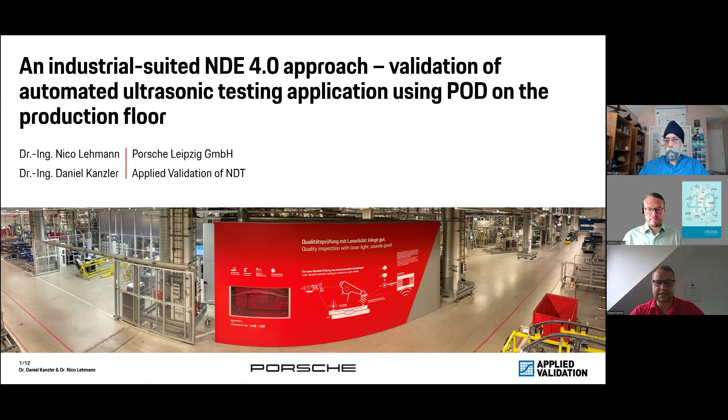And how do we get there? Well, I want to give you an idea, show you how the process is working, etc. Right now, on the first slide, you see the surrounding of the Porsche Leipzig GmbH production floor, where they build, and in this specific case, test the car bodies, and the issues I want to talk about today.

So a short agenda: I will explain a little bit the state of the art, what is done right now, or what was done before we started the project. Then I will shortly talk about the non-destructive automated testing for the car body. I'll give a short introduction on POD, just in case you're not so familiar with it, and what we changed to use it here. And as the final point, I think this is the reason why we got the award, a kind of idea of a real-time POD on the production floor.

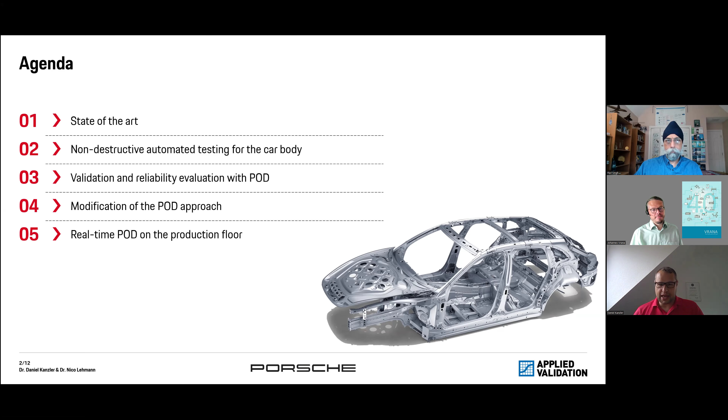So you see the component we are testing right in the lower right corner. This is a car body, a specific car body of a car a few of us would love to drive or even to have. This one is a Macan Porsche, and for that one to hold the structural integrity together, they have resistance spot welding.

So you don't have a line, but you have different spots—a lot of them, like 5,000 each car. Right now, even when we are talking a lot about gluing, etc., still 70% of the connections in the car body are done by spot welding.

For the spot welding, you have different possibilities how to see if the quality is correct. I'll just give you an overview about the matrix. In our specific case, I will talk about the lens diameter, even when I simplify it a bit more. So whenever I talk about the spot weld, it is the diameter, as you can see on the pictures. This is what we are interested in.

The interesting part is we can do that with ultrasonic, and we can also do it with metallography, to cut it open and see the real value. Both are quite important, especially when you know a little bit about POD. You will see why. Right now, the golden standard in quality testing is an imaging ultrasonic testing method.

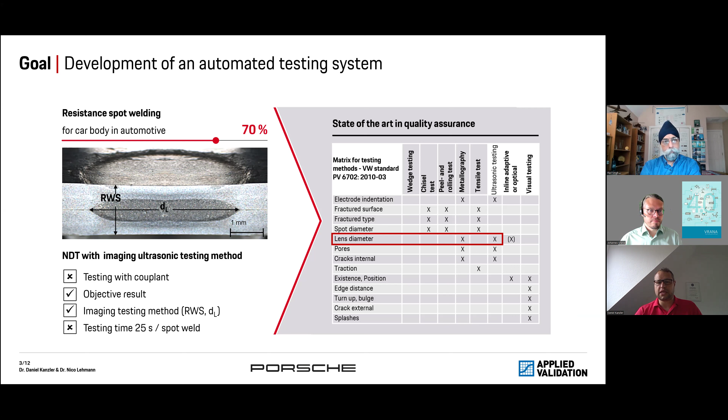So this is kind of the state of the art. Then a few years ago, they tried to think in a completely different way, in an automated NDT system, just to get the amount of testing higher. And the question is, how good are we?

This slide is quite interesting right now, because on the one hand it is the project history. However, right now it's being generalized, and it will be written down in a standard, a VDA standard 236-170, which will publish probably end of the year. So this will be a kind of standardized procedure how to qualify your NDT system.

So in the first phase, we had the principle suitability—is the testing system adequate for what we are doing? The next one is concept suitability. You see it on the picture: we have the first components, realistic components, and for the first time a robot. We did the experiments there in Vienna.

In the next step, we have the first pilot testing system, which is right now in Leipzig. So you have the full car body, and not anymore the small robot, but the huge robot. And there, of course, we start with the validation. We start to think in the direction of POD. And in the end, and this is right now the time, it is the capability of just looking on the production floor to see it while it is in line, to have the validation.

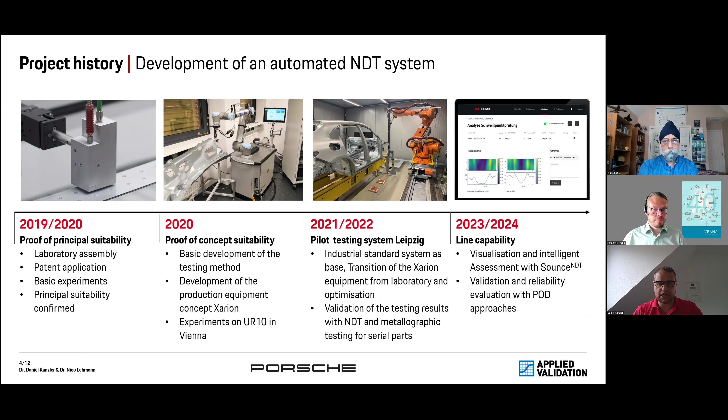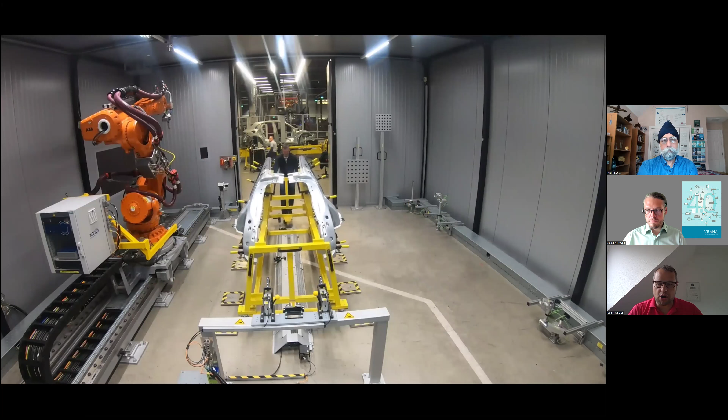Here are a few pictures, a short video on how it is done right now. So you see the big robot. You see the first parts, which are right now on this yellow kind of holding system. You see here the testing system, the new testing system, which is calibrated with the huge robot, going to different parts right now, to different spots, testing them.

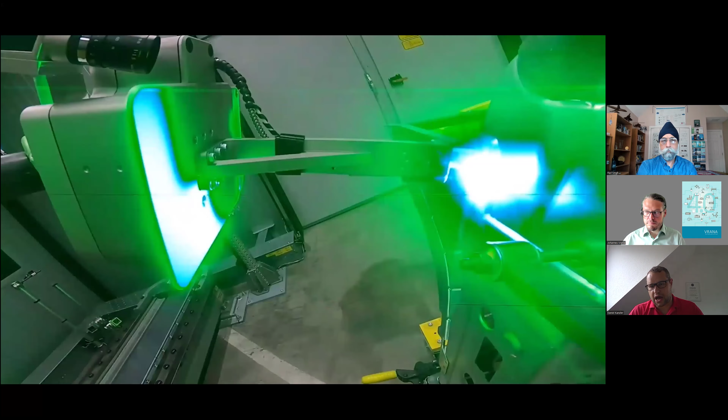Then you see here, for example, also how it is done, in more detail. You see the round little spots—they are the welding spots. And the green is, well, a laser system, a laser acoustic system. Through that testing, it is quite possible to use it on very small areas.

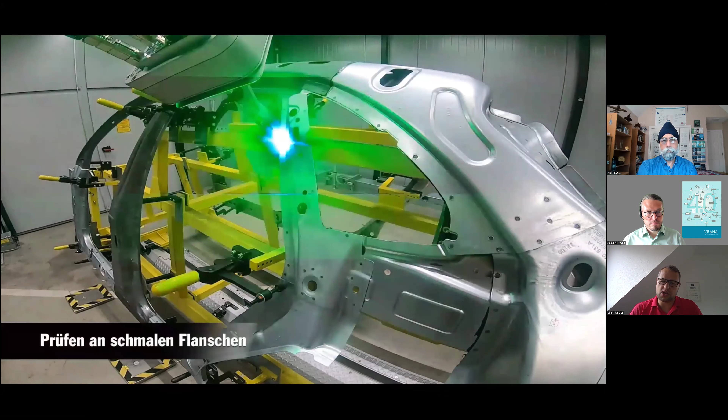Through that time, the testing, the probe was changing in different variants. This is where you have the German slide on the corner.

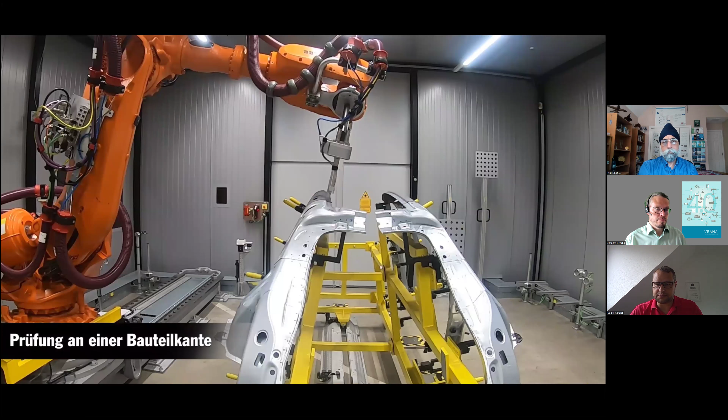So the amount of spots, how to test them, is quite easy to reach right now. And with the robot, it is quite fast. So with that, the whole amount of testing is raised really high.

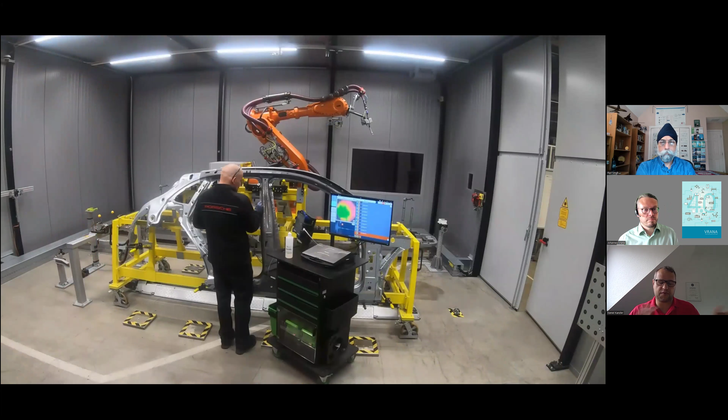And here you see the golden standard. So the person is right now checking a few of them to see what are the results in the imaging, ultrasonic testing. You see there the kind of C image of the ultrasonic testing system. And that one we will also talk about.

This is a little bit to give you an idea about the real industrial application, that I am not talking about some scientific, let's say, nonsense, but a really shop floor level. And so right now we get a little bit more deeper into POD.

For that one, I think it makes quite a lot of sense to look a little bit back, like around 20 years or almost 30 years. At around 30 years, my former boss, Christina Müller, that was even before my time, she had the great idea to say, let's start with a POD and let's put them into standards.

At that time, there were two different ideas of that. And the automotive industry at this time was completely against it. It was one of the major players, and they were so strongly against it that they stopped it. So at that time, Germany just said, okay, we won't do it.

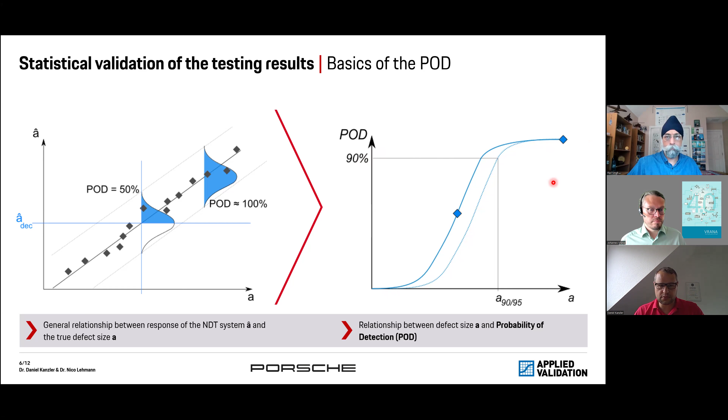However, then he started and explained me a little bit about his spot welding. And the first thing was, he was not really interested in some defects. He was interested in the true size of his spot weld. So if the spot weld is large enough, for him, the weld is okay. If it's too small, then he has an issue.

So the first thing is, when we are talking about A as a spot weld, we will probably turn the POD around. The second thing is, for the laser acoustic technology, I didn't introduce it so strongly because I'm not really an expert in that, but you have an indication, and this indication is very dependent on how you do the signal processing.

So you can, for example, take the highest points, etc. You can take a 3 dB drop here or something else. So when we're taking the highest point and you get the idea this one is much larger than here, then you have an offset. The offset is something in physics that is explainable. But that means A hat might be something larger than A, but it will have something like millimeters on it.

Normally, in a typical POD, when you have, for example, ultrasonics, you have dB versus your millimeters. So this is the next thing. Then you have the offset. So I said, okay, maybe we should think that whole POD approach a little bit through.

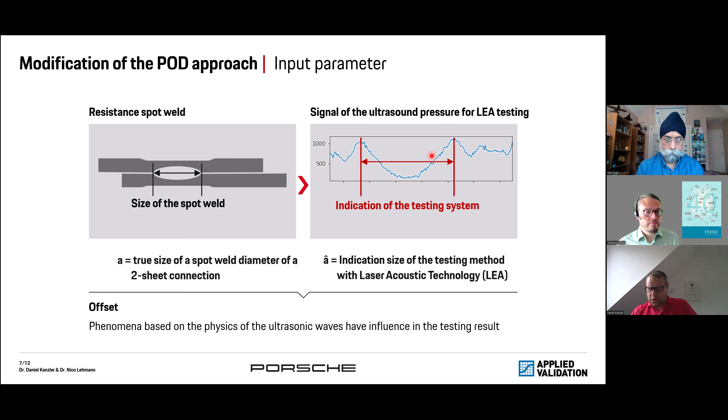Then I came with the a90/95. I said, we are not so interested in it because we have something else. We have a DL-min. This is our minimal diameter. This is where we have the difference between this part is okay and it's not okay.

So when we sat together for a few hours, we realized our Â hat versus A diagram is completely different to what we had before. So the question is, could we still use the mathematical approaches, and is it helpful?

I want to explain a little bit more about it. So you have the Â hat and you have the A. At the A, you have a critical threshold between it being okay and not okay. Based on your testing system's decision threshold, you won't find everything above it, and you will find some. These are our hits. Our defect, our spot welds are too small in this area, and our testing system is giving us that information. But if we have too small test spot welds and our testing system says they are okay, then we have the area of misses.

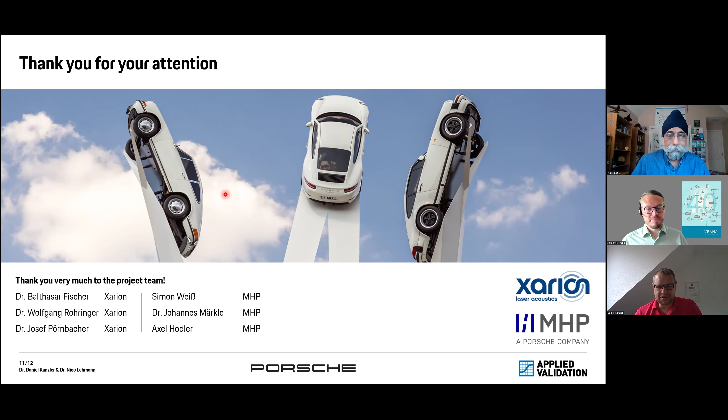There are two answers for that. The first answer is lying in the statistics. For example, take some distribution, a Gaussian distribution is never at 0. It is all the time going in that direction, but never 0. So when we are using just a normal distribution, our curve is doing this.

The question is, is the area where we are interested in, or is it more like this area where we want to see the most of them?

That's a good point, that's a good point, I think that's a good point. As to what's the relevant domain of focus that you are interested in, right? If it doesn't matter whether it was 0 or near 0, it has very little practical implications, more theoretical.

Exactly, good point. And the second point is what we are doing right now is we are looking at different things. We are looking, for example, at the robot, sometimes at the human person even. However, in the process, you are all the time kind of filtering. So for us in a specific field, it is quite important to say, is that testing system capable of solving my problem? And at the same time, you still have all this quality management stuff and people checking, is the testing system really doing that, or is it doing something completely else?

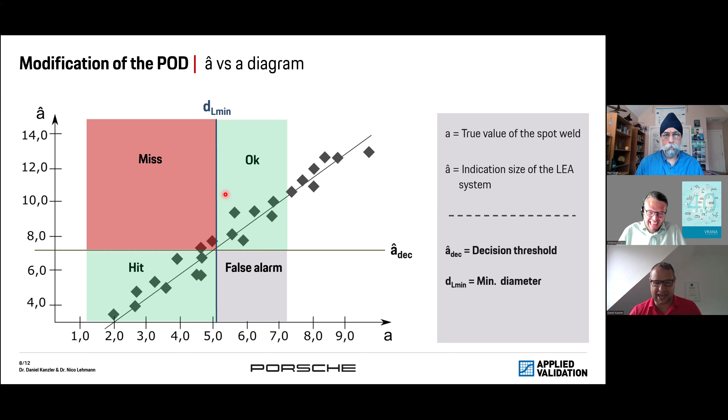So how many more do you test? I can't even tell you that. I have like an amount of testing spots, and when you have, for example, here around 7,000, and when you just think of the manual testing, which takes you 30 seconds for one spot, you can kind of calculate how many people you need to have that.

This is maybe not the direct answer because, as I said, I'm not sitting in Leipzig. This would be more a question for Nico, but I hope that gives you a clue about it. So for this one here, for this real-time POD...

I guess you need both measurements. You need the manual UT, and in future, once you would directly go to only doing automated LEA testing, then you would switch off that POD cockpit.

This is quite a statement. I can't look into the future in companies like Porsche. However, the topic about sampling is still existing all the time.

So at the very first start, you will have both in parallel, with a significant amount additionally on the manual. However, you also have different spots which will be in quality management for cutting open. You still have that, right? So you have more or less three methods, and then you might be fading out somehow the manual after some time.

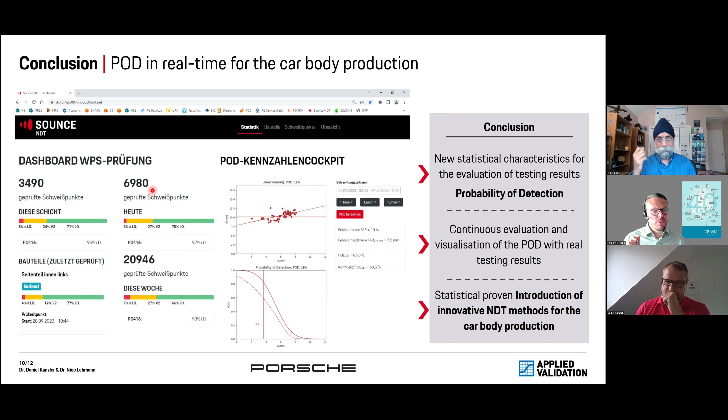No, yeah, this one. Now, it could be that I'm doing a wrong interpretation on the data we are seeing, and perhaps also the factor of sampling size needs to be taken into account to do a real proper interpretation of those curves. But here it looks for me like what you call imaging UT testing or manual UT testing, that one has a better POD than the LEA.

For that specific case, as I said, I chose that, yes. For that specific case, it is like this. However, 3 comments to it.

First of all, these POD curves were done kind of in between the processes, so I think they came around with a new probe there even after that. However, it would be, for our understanding, it is also necessary that the imaging UT testing system for this case is better, because we are using it as the standard method.

If it would be the other way around, then the POD wouldn't show you how good the testing system, the automated testing system, is, but how good your reference testing system is. So this was this specific case.